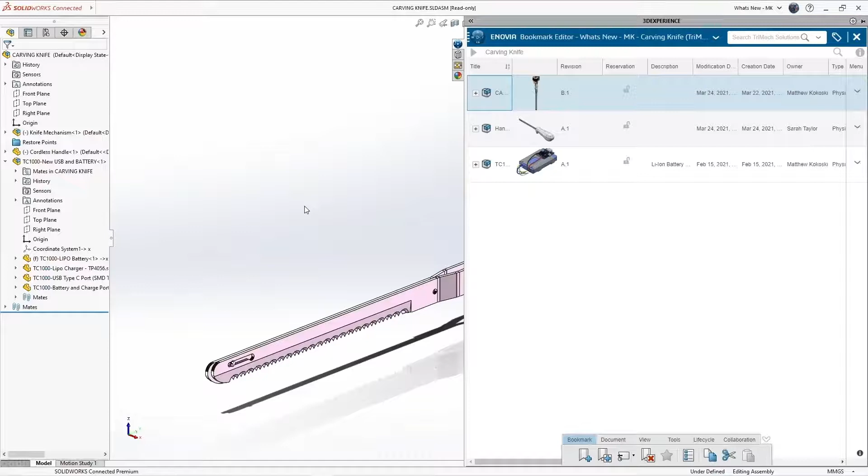I'll open the carving knife product into SOLIDWORKS. Once the component loads, we're going to start our work and our project at hand, which is to insert the cordless handle from xShape. I'm going to go ahead and drag that part in SOLIDWORKS and open it in its own window. Of course, right now SOLIDWORKS is warning me that I only have read access to the file, and that's okay.

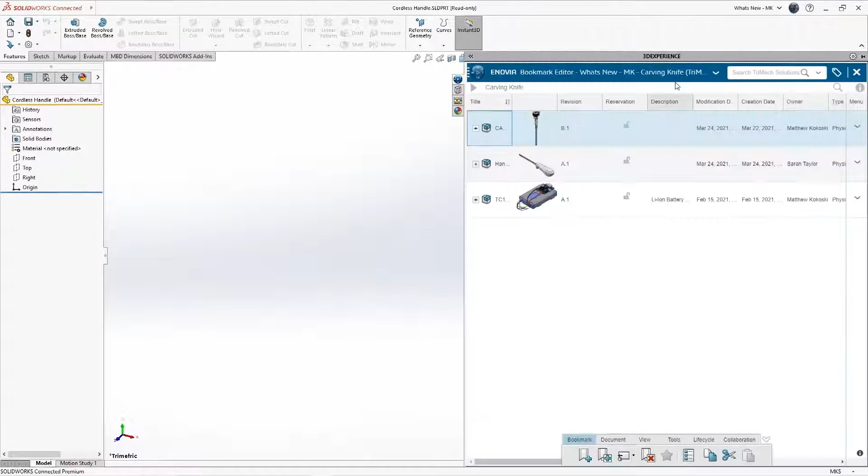Back in our bookmark editor, which makes convenient access to the file that I need, I'm going to drag and drop the handle from Sarah to open it in its own window as well. You can see that that part loads very quickly into SOLIDWORKS.

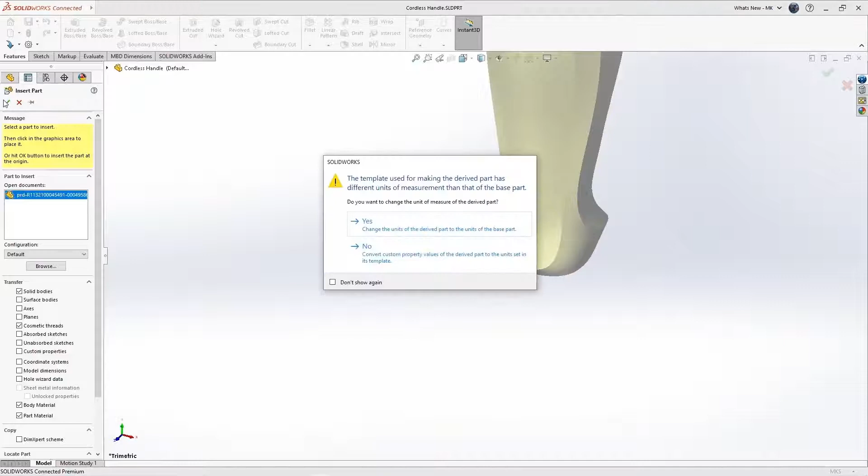Back in the cordless handle part in SOLIDWORKS, I'll go ahead and take ownership of the file with a reserve that allows the user to write and make changes to that particular instance inside of SOLIDWORKS. And I'm going to insert the part that I just opened from the platform. Of course, in this case, it creates a link. So if the item would change, which we'll show later in the video, we're going to be able to utilize that change within SOLIDWORKS as well.

Next, I'm going to shell this. So a shell operation within SOLIDWORKS allows for, in this case, a uniform wall thickness at 2 millimeters for this to be injection molded.

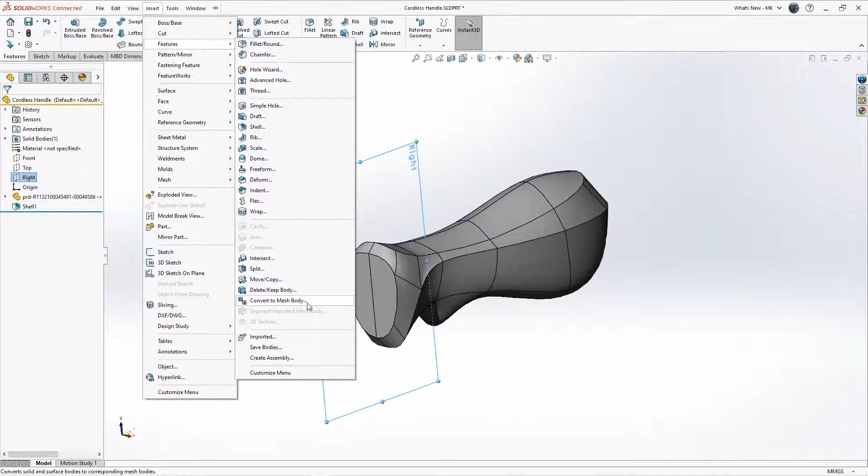Naturally, we're going to split this with respect to the right plane. So the split operation is a traditional Boolean operation within SOLIDWORKS that allows the user to separate. In this case, we're just naturally separating between the right and the left hand of that handle.

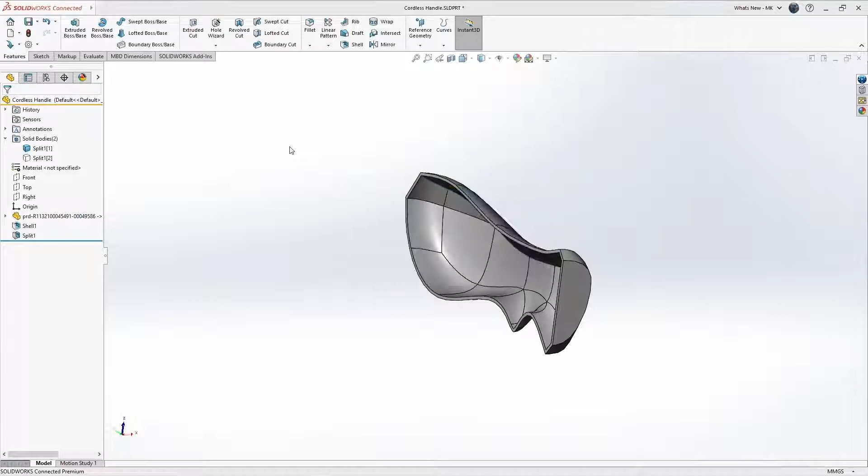I'll hide one of the bodies, and as you can see, we've made quick execution of this split operation to generate 2 bodies within this SOLIDWORKS document.

Back in the product, back in the assembly, you can see those changes propagate from the part, from the handle that was originally created in the 3DEXPERIENCE platform by Sarah in xShape.

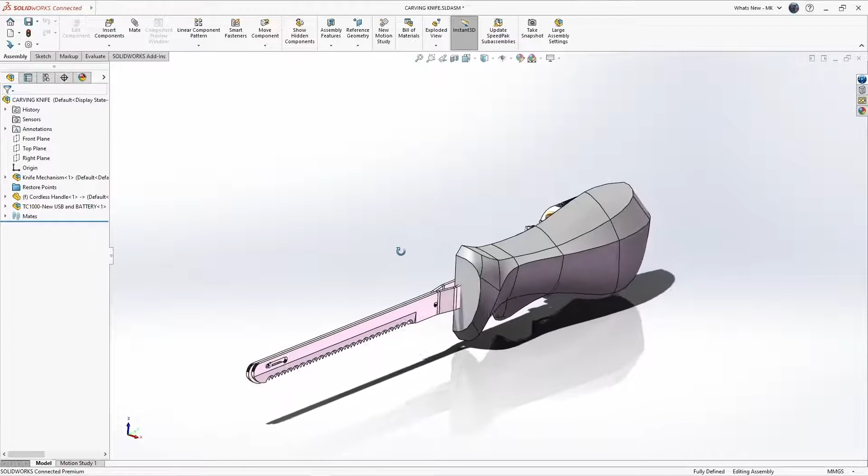Again, I want to take ownership of the product. I'll reserve that document, and this will allow me to, again, make changes to the assembly.

In this particular instance, I want to continue working off of the other half of that handle. So I'll hide the right hand and then show the opposite hand.

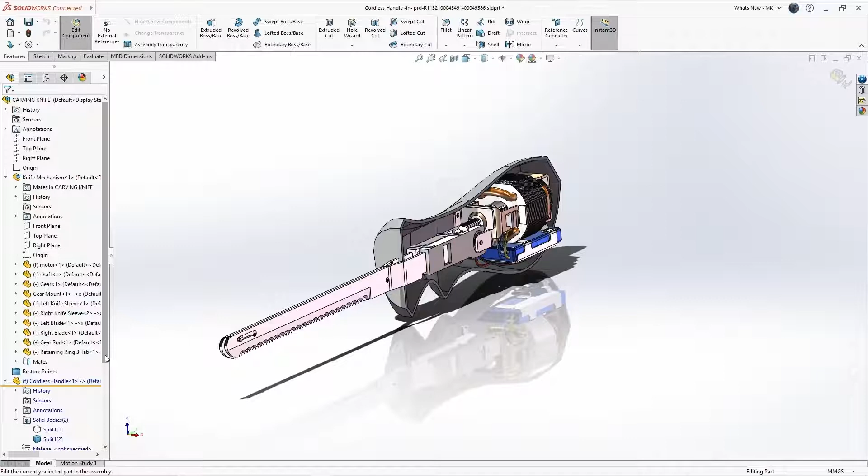I'll edit this part in context. This allows me to still see the references within SOLIDWORKS and continue to make changes to the part that we see here on screen.

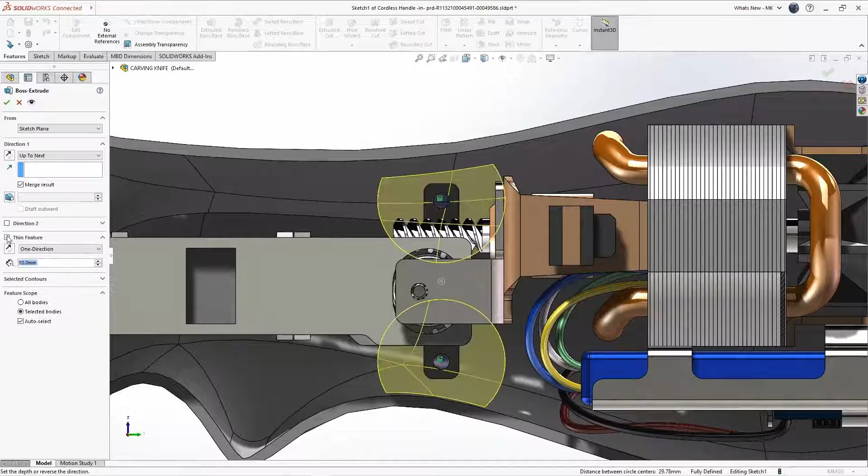Next, I'm going to create some standoffs. Naturally, in this case, since the part is injection molded, we're going to create some plastic extrusions up to the next feature within the handle design. Additionally, I'm going to engage the draft operation so that that boss is thicker as we get closer to the material at the base.

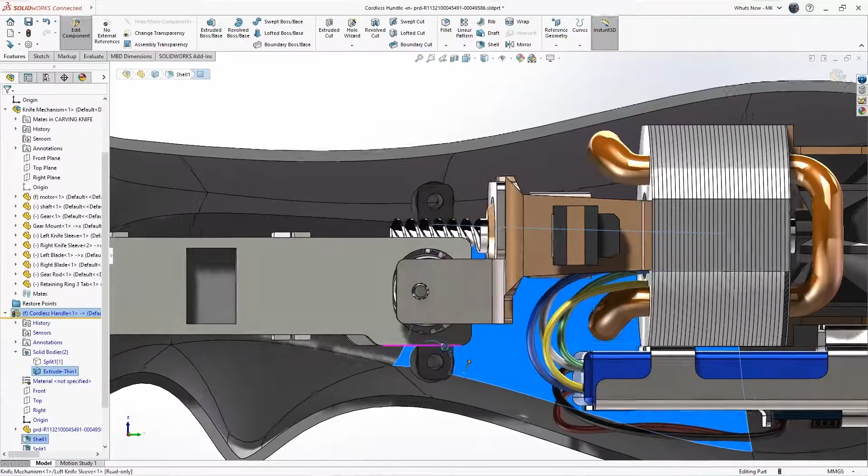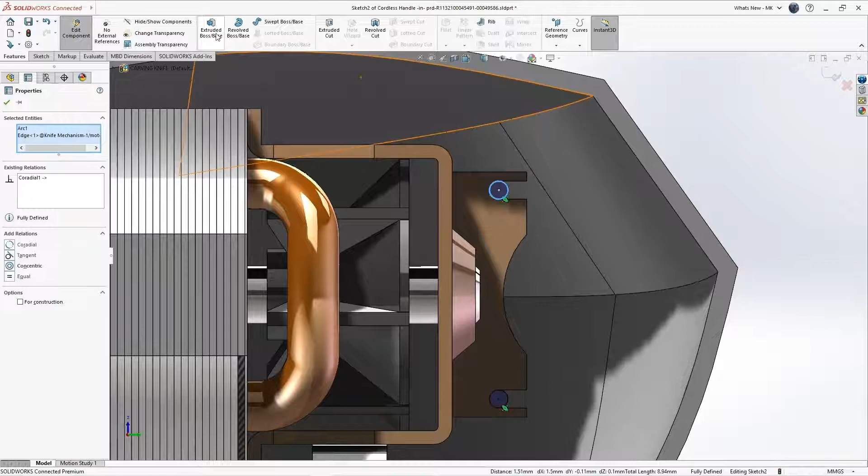We're going to do that on the back side as well. So I can very conveniently select through the face, open up a sketch, and again reference pre-existing geometry within the model for our references downstream for the standoffs. I'll add some co-radial relations here that will define both the diameter and the position of those standoffs in this two-dimensional sketch. And we'll use the same options as the prior extrude as well.

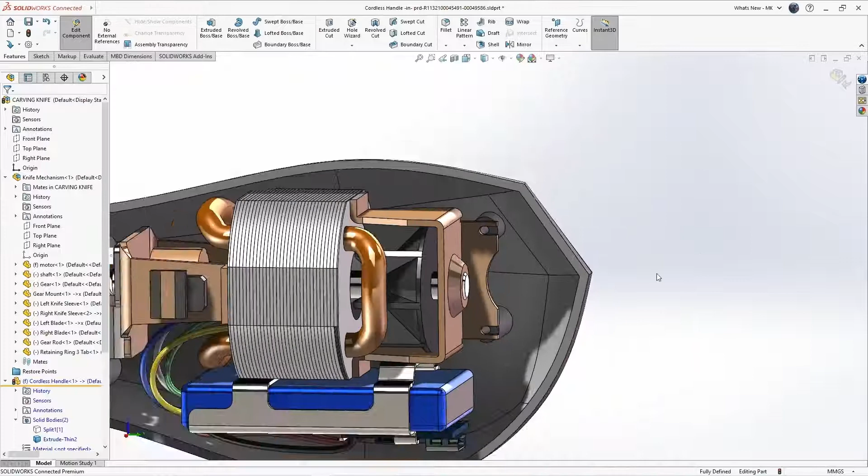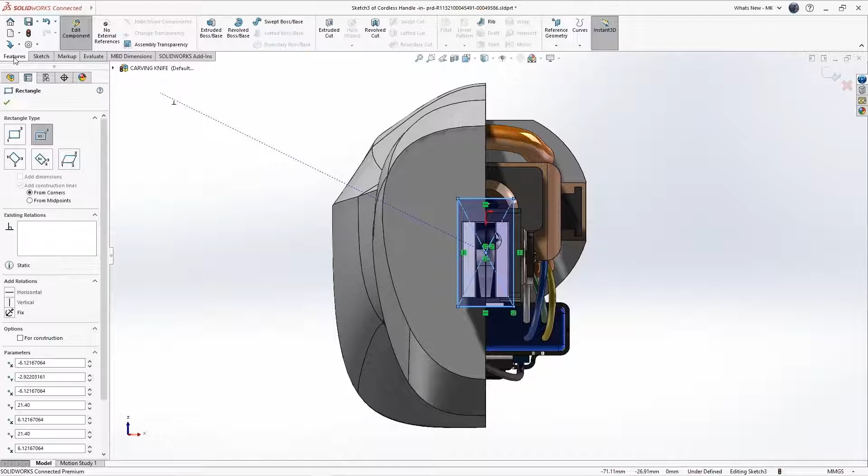The very last thing that I want to make sure happens here, the knife mechanism, the general mechanical guts of the assembly, of course, protrude through the handle. I want to allow for clearance here, so I'm going to sketch in a simple rectangle around that area. Again, building in the necessary relations to that existing geometry, and easily extrude cut this through that front face of the handle.

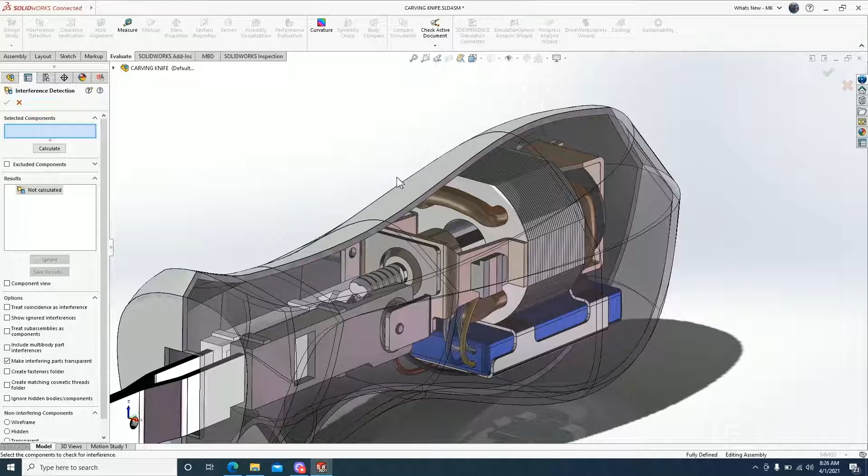So at this point, we've generated a lot of things here on screen. I want to ensure that we don't have interference. I can run interference detection, in this case between the cover and the motor, and ensure that we either have clearance or we don't. And I would have to propagate those changes back to Sarah.

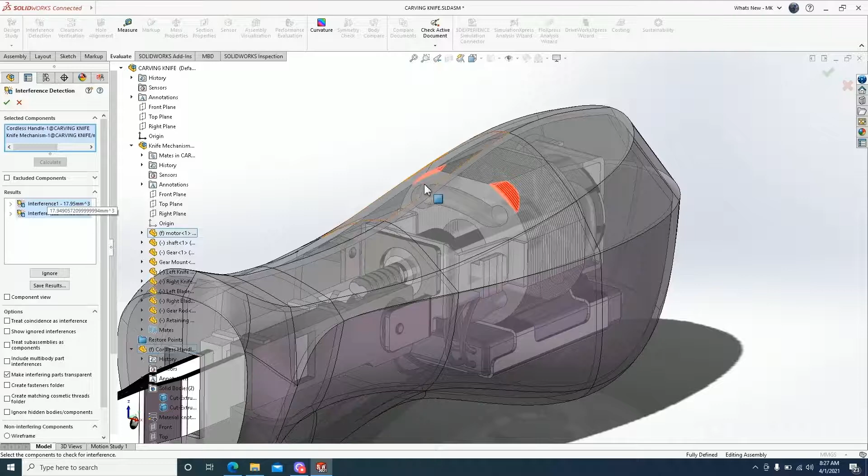Very quickly, we get results, and as we can see, we do have interference. Not a big deal, but I will have to communicate this back to Sarah, who generated this original shape in the platform through a web browser in xShape.

Back in my view in the web browser of the platform, I just want to let Sarah know that my work here is complete, but we need to update the shape coming from xShape.

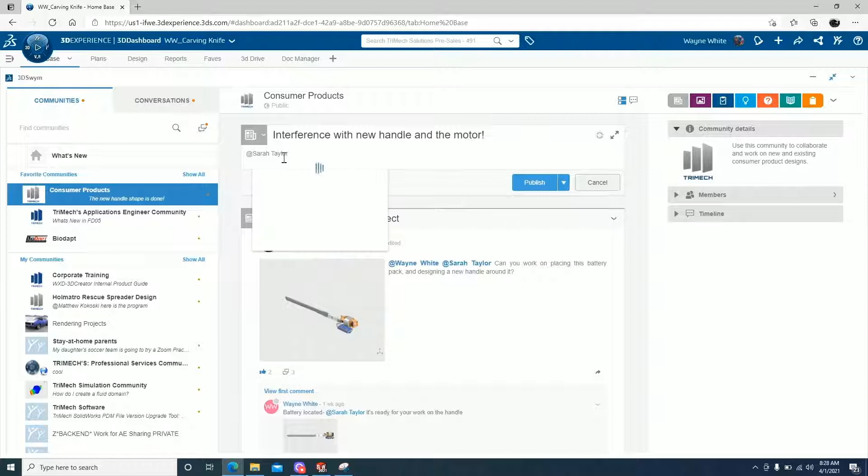In this case, I'll add a new post. Specifically, I want to tag Sarah and let her know that we have a problem here. So she'll get a notification, and then she can immediately start work on those modifications.

Additionally, I'm going to just upload a simple picture that I took of the interference from SOLIDWORKS Connected.

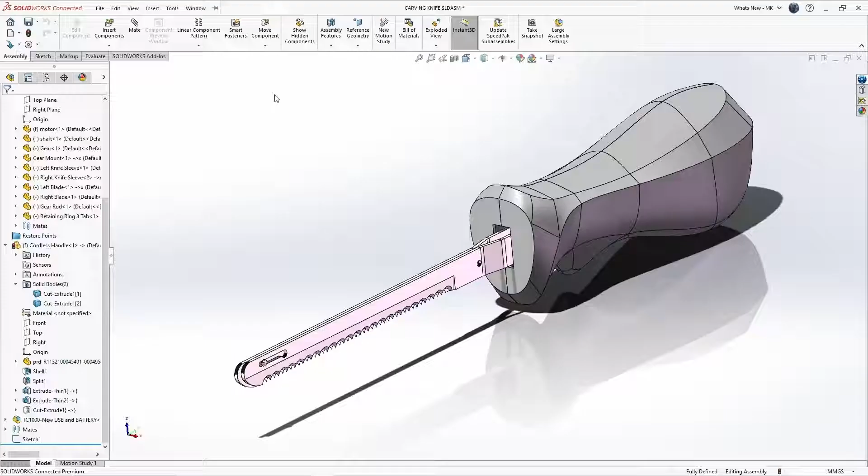And it's that easy. I can publish this back to our community, at which point all of the users in that space will understand that we have interference in that location.

Last, I'll go ahead and save this to the platform so everybody can see the modifications I've made. I do always recommend for people to put in comments because those are searchable downstream and people can understand what modifications have been made at different points in the workflow.

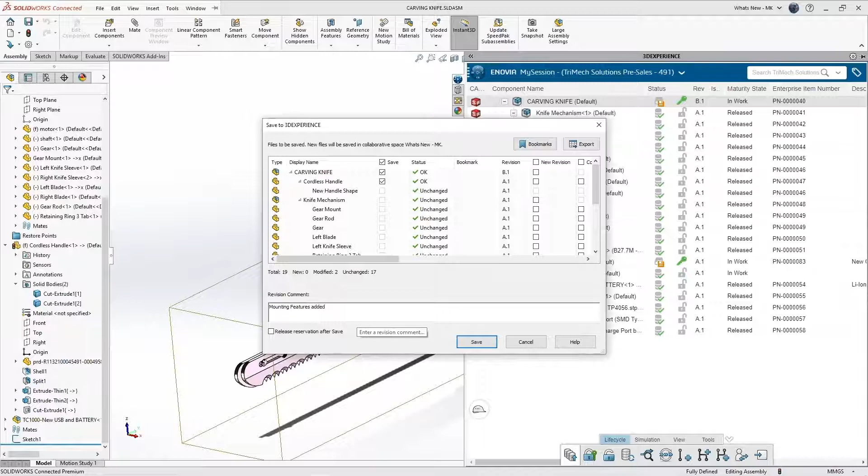The last thing I want to do here is just unreserve those files.

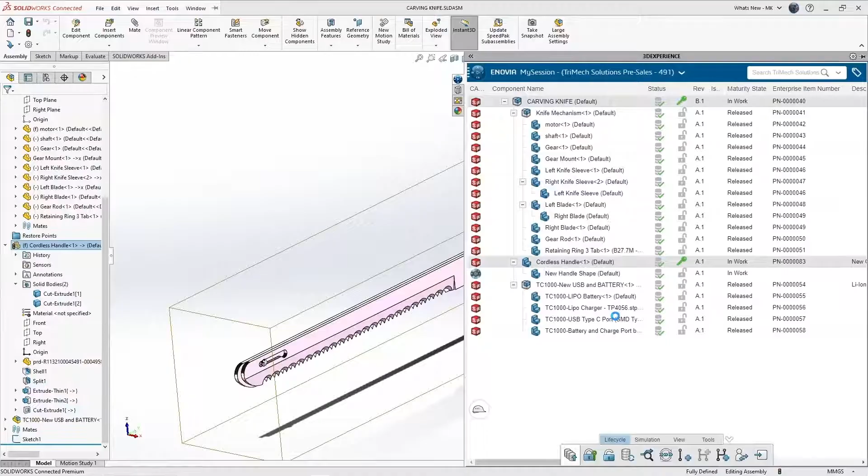So that's a wrap for this video. You saw that there's interference between the motor and Sarah's handle when I imported it into our assembly. I commented to Sarah to update that, and in the next series of videos we're going to see how we can handle change coming from xShape back into SOLIDWORKS. Check it out.